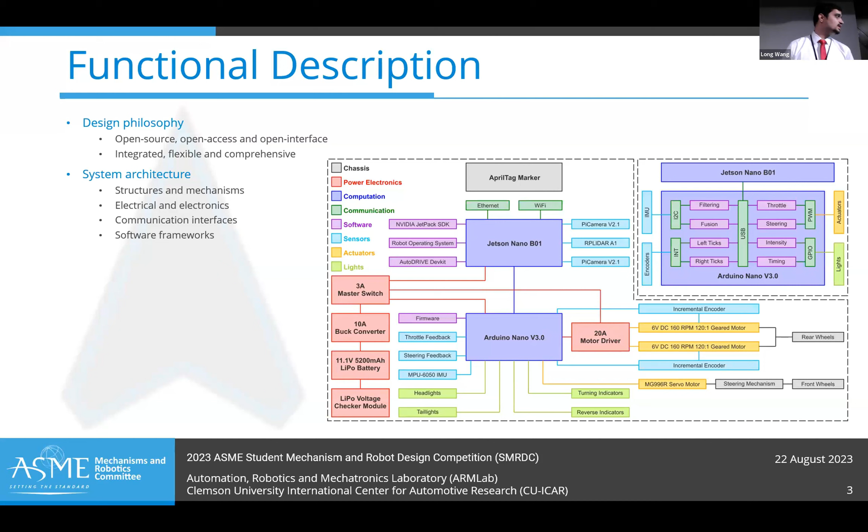The functional description and design philosophy behind this ecosystem is to be open source, openly accessible, and open interface for anyone and everyone to use. This picture depicts the architecture of the vehicle, where we have highlighted different subsystems according to color codes, and the connections highlight the interaction between each individual component.

Put together, the vehicle looks something like this, where all these subsystem components are integrated into a system with a small footprint of just 30 centimeters, which enables you to use this platform for in-house, in-lab, or in-class research and education.

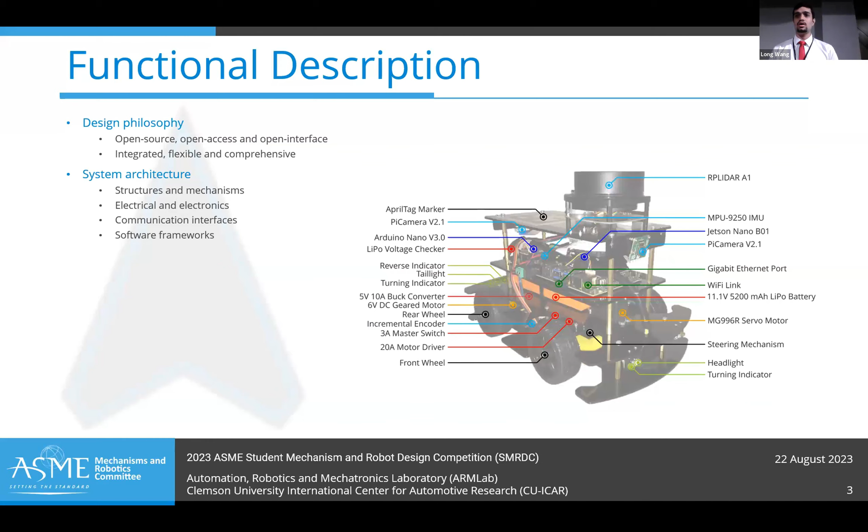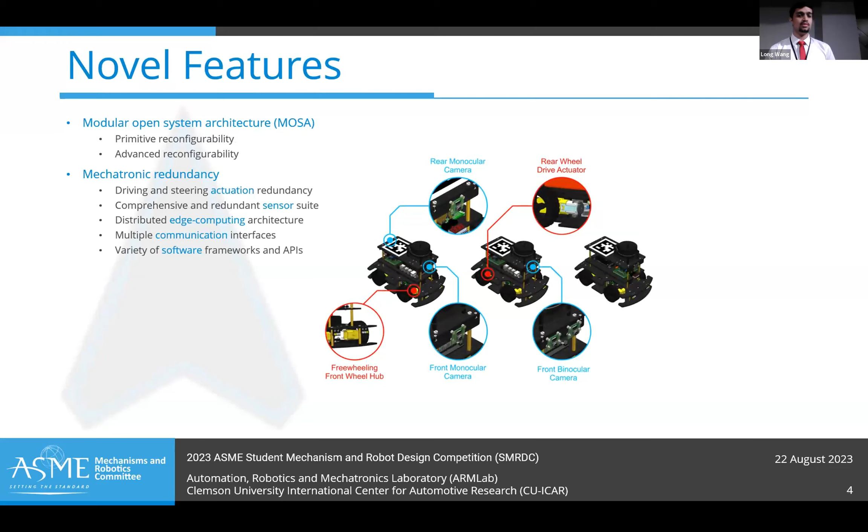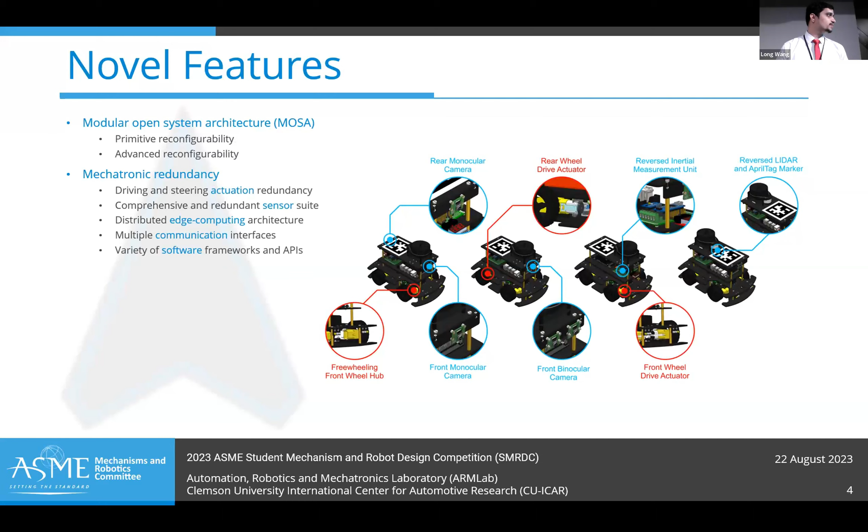We have tried to segregate the novelty of this platform into two aspects. The first is the modular open system architecture, which enables both primitive and advanced reconfigurability. The picture shows different primitive reconfigurations which are possible right out of the box, letting you change, add, or replace any of the existing components or subsystems.

With advanced reconfigurability, you can tap into the core design of the chassis, for example, or the energy management systems, computation, communication interfaces, software development frameworks, sensor suites, actuators and actuation mechanisms, lighting and indicators, or any other components and subsystems of the vehicle.

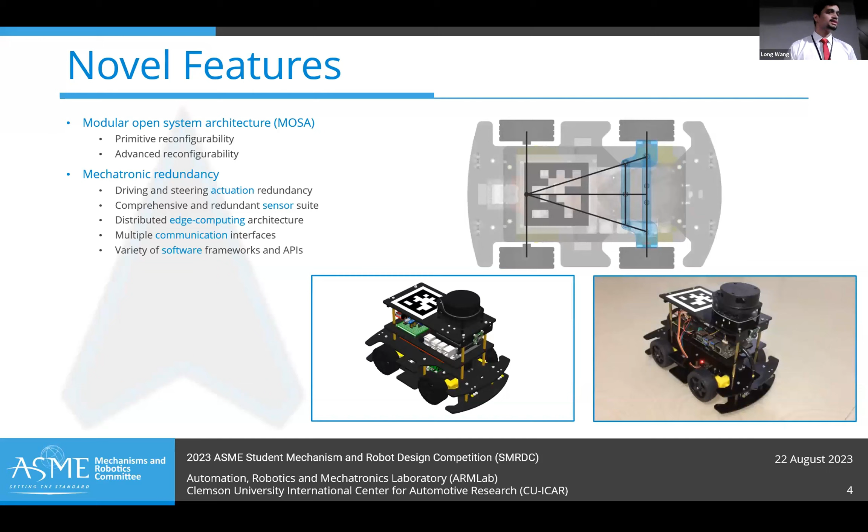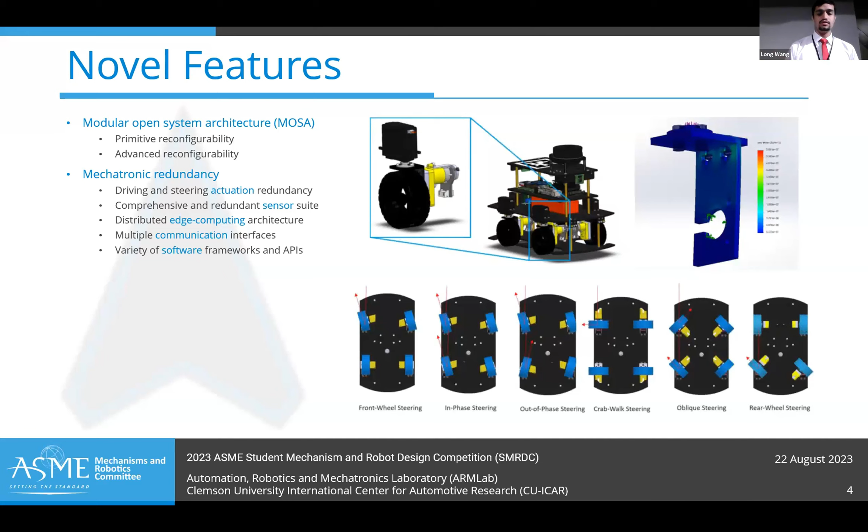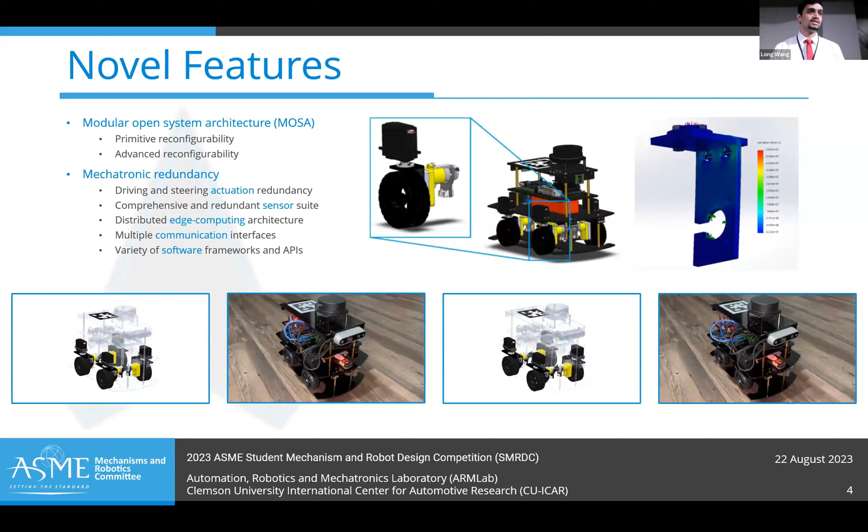What's more interesting is the mechatronic redundancy. Here, for example, you have a conventional Ackermann steered vehicle designed using the same platform, with a hardware mechanical linkage. But you can choose to add 2 degrees of freedom joints to each of the individual wheels, giving you an enhanced configuration space where you can do torque vectoring for individual drive actuators, as well as have novel steering mechanisms and study their analysis in the real world.

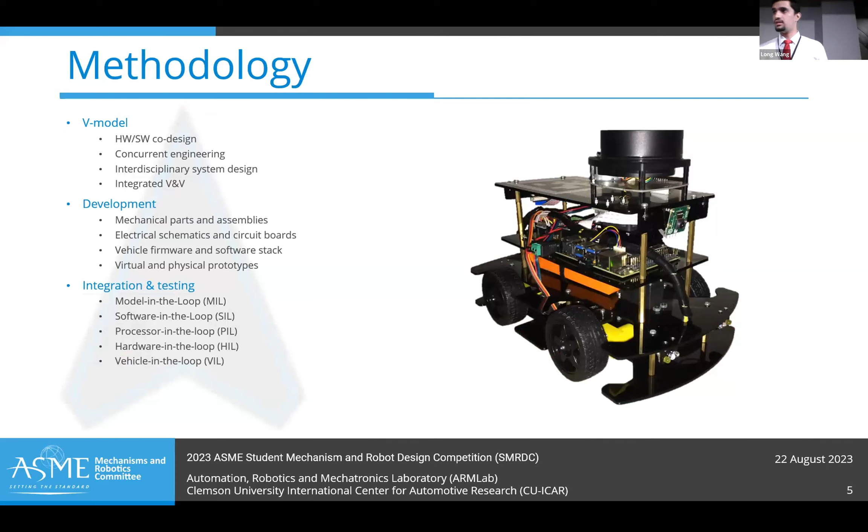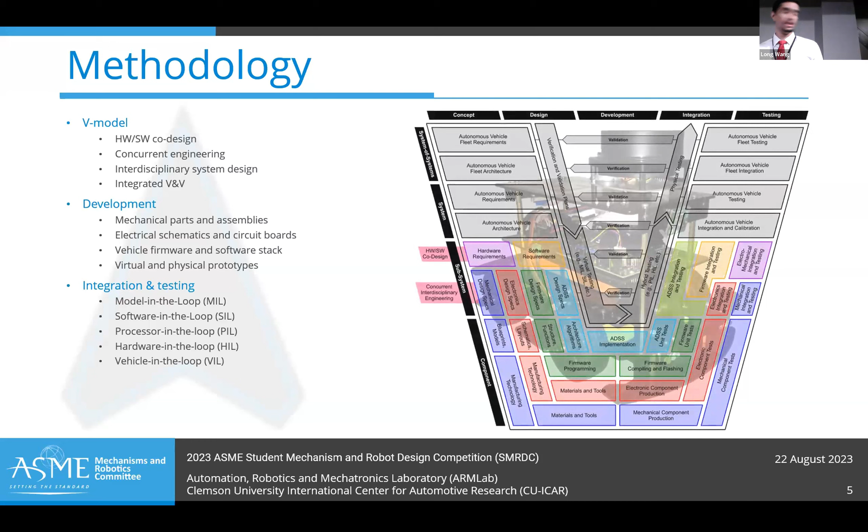Coming to the methodology, the way we designed and developed this prototype was by adopting the well-known mechatronics V model, which helped us co-design the hardware and software components in a concurrent engineering thinking framework. Here is how we came up with the virtual prototype and virtual model of the vehicle, as well as the physical prototype.

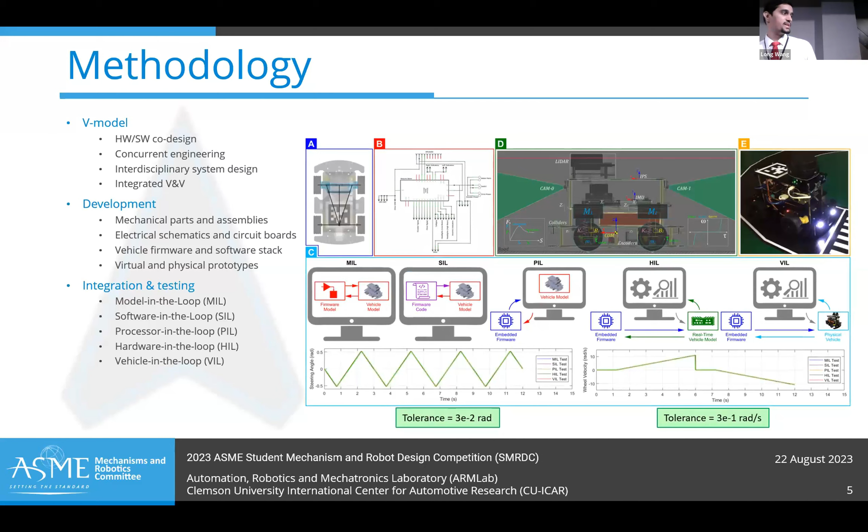We went ahead and performed X-in-the-loop testing, starting from model-in-the-loop all the way up to vehicle-in-the-loop, to validate this design and perform design optimization at every step to ensure we meet the specified tolerances, as mentioned below.

Coming to the benefits and applications, this project has a huge scope. We are demonstrating just 4 sample applications. The first is autonomous parking using a probabilistic robotics approach, where the idea is to use a modular approach of perception, planning, and motion control to navigate tight spaces.

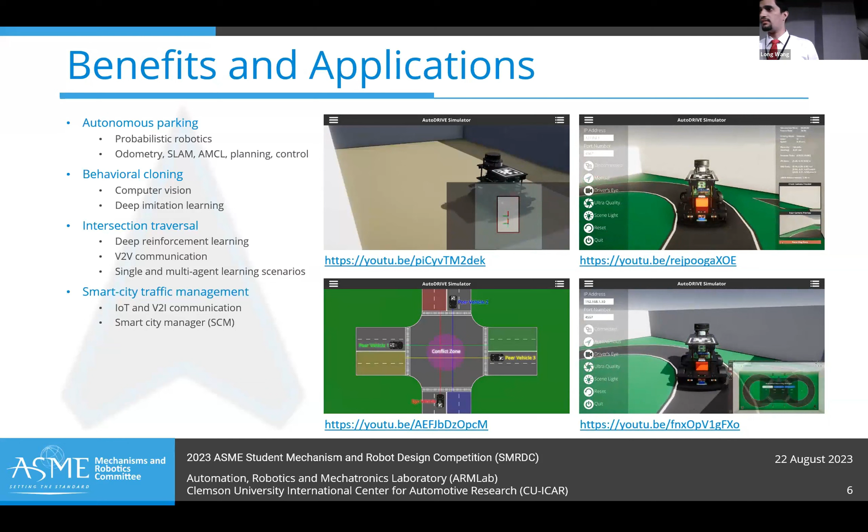In the second, we are using visual perception to perform behavioral cloning. The third is multi-agent intersection traversal in either a single or multi-agent learning scenario. And in the final one, we are demonstrating smart city management using over-the-air control commands from a smart city manager server.

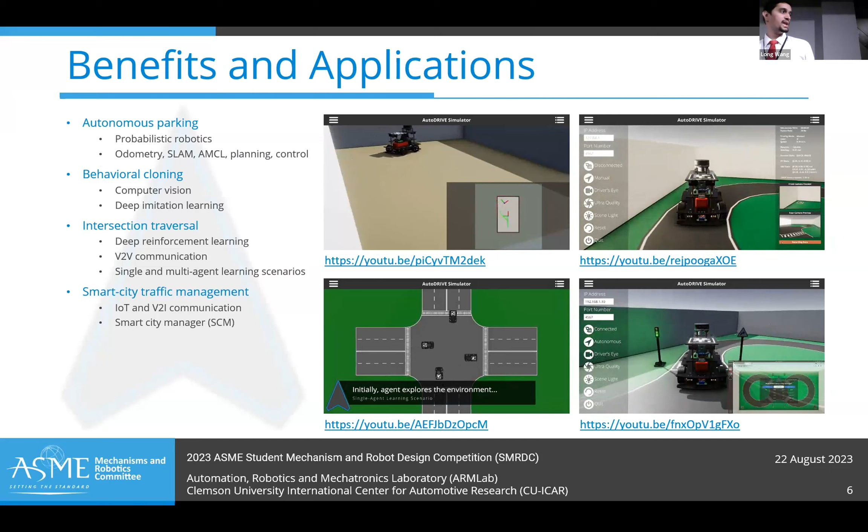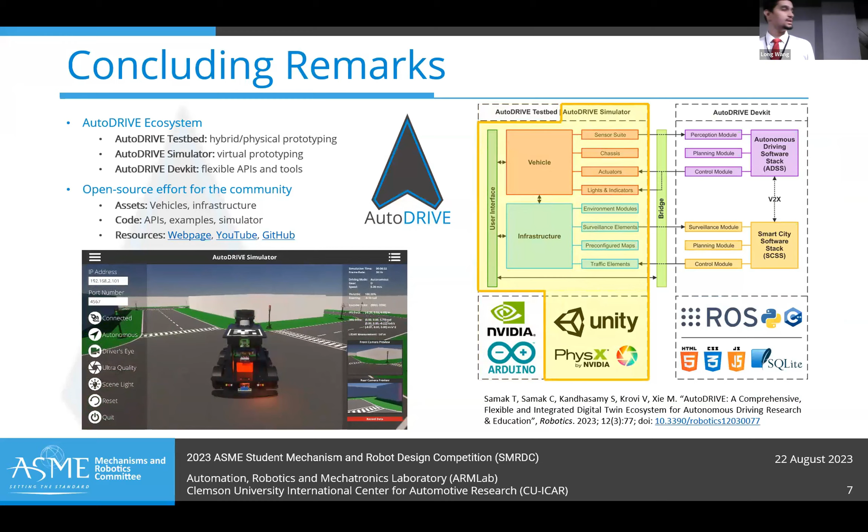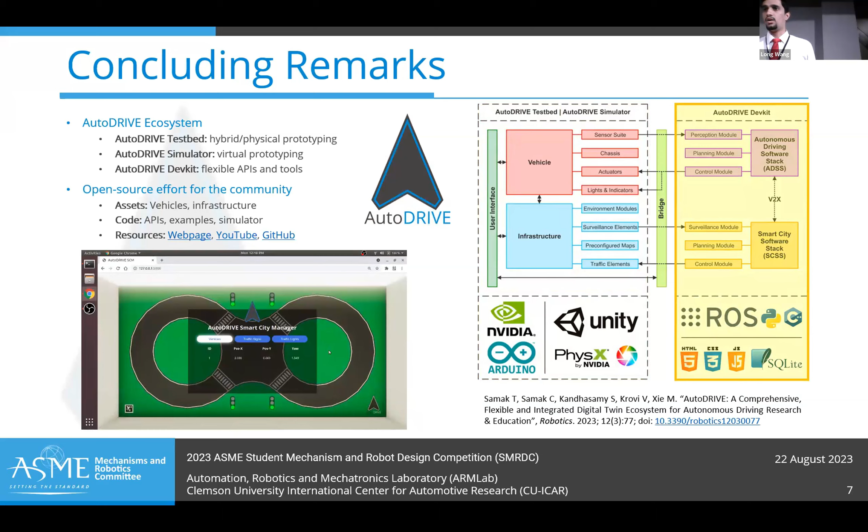This was just the tip of the iceberg. What we are overall proposing is a comprehensive ecosystem that has a hardware testbed for physical prototyping and testing, a software simulator that acts as a digital twin which enhances variability and corner case analysis, and a modular software development framework supporting a whole host of flexible APIs and tools that can help develop autonomous driving as well as smart city applications.